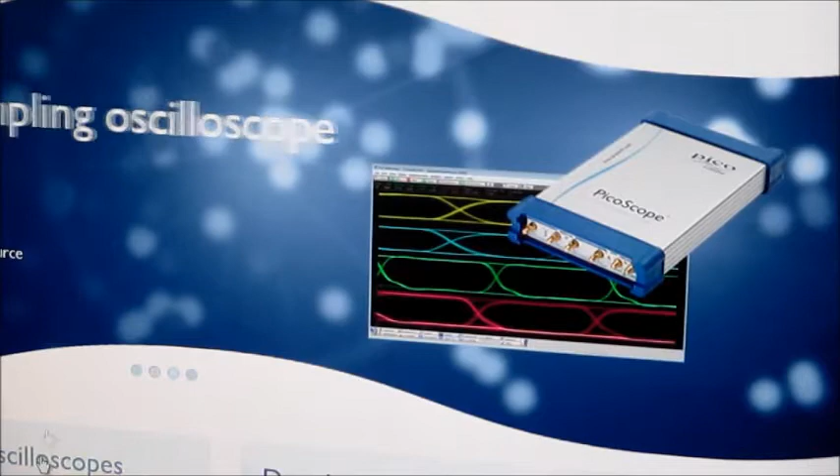Okay, this video is about second lab, Picoscope. Okay, it's a lab sheet for this 381 class. Again, it's called second lab. And I need to apologize, first of all, the Picoscope software is all PC driven, it's not Mac compatible. So I'm sorry, nothing I can do about that.

But once you get to picotech.com, come over here and do their downloads, and you can get their software. Software is free, and it shows up over here. Okay, you can download it on your PC. This way you can view all the folders and saved waveforms. I'm going to go view. So I'm just going to go ahead and close this out.

Okay, in this folder I've got 381 Pico folder, first exercises folder, TDC. You need to download or click and drag this folder onto your desktop, because that is a great little software. We'll show you how that works later. We'll open that up as we go. But for starters, let's do this.

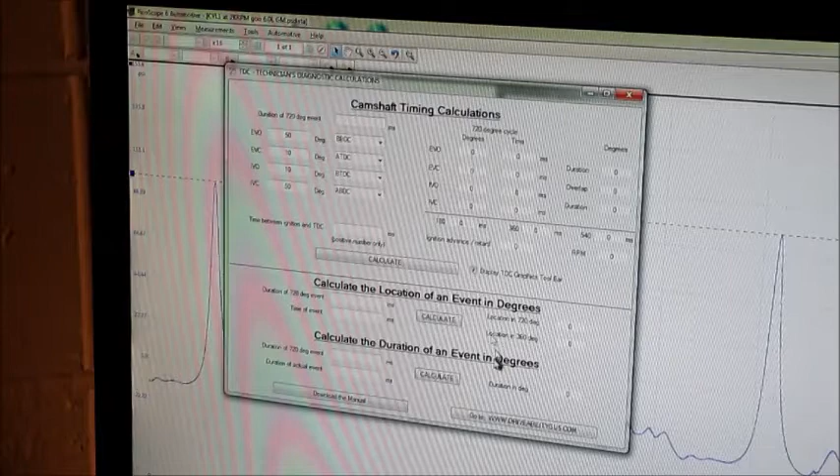Calculate. Let's get this out of the way. Let's show you what this is all about. So I'm going to turn an overlay on, and look what appears. I can put that peak with this 0 degree indicator, 720 degree cycle event. We'll slide that there to the other peak. I'm going to drag this down. We got to readjust it. It always changes a little. You got to change it back and forth a few times.

Okay, 0, 180 degrees. We're at bottom dead center now. Here's where the exhaust valve just starts to open. And then top dead exhaust stroke, of course there's no peak here of pressure because the valves are open, especially the exhaust valve. That's where a peak would be for top dead center exhaust, but once again, there's no pressure in the cylinder, the exhaust valve's open.

Somewhere in this region is where the intake valve opens because we start being exposed back to the vacuum. Of course, the piston's moving down, the intake valve is moving open, and this will be like bottom dead center after the intake stroke. The intake valve probably closes right here, and we start to build pressure again for the next event.

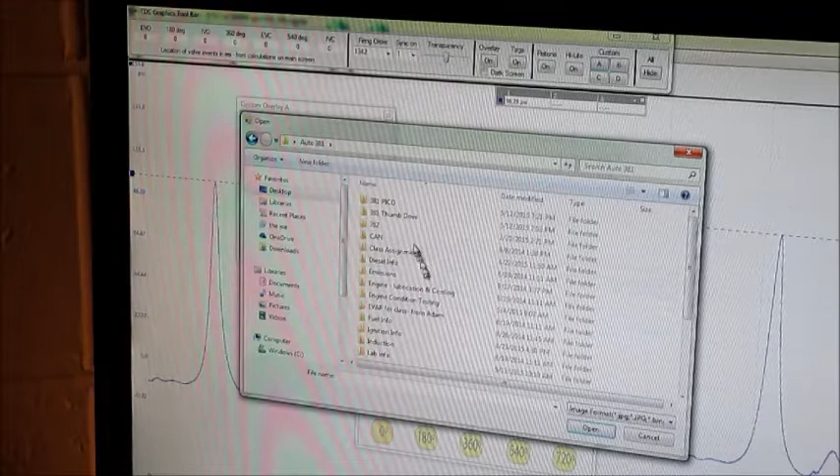Let me think here. Where have I got that hidden? Just got to find my TDC software folder. So let's go into Pico. Whoops. Where have I got that folder? Here we go. In the actual software folder, overlays. And I like this red compression 3 bitmap, if that's what it's called.

And I now have degrees, and I can overlay this. I'm just going to clear this one out, and let's use this overlay instead, because now I understand how the degrees are. I'm going to go peak to peak, and I'm going to drag this down. So now, whoops, slightly slid it off. Drag it down just a little bit so I can explain more.

Every one of these red little hash lines is 30 degrees. 30, 60, 90, 120, 150, 180. Here is where bottom dead center would be. We like to see the exhaust valve open somewhere really close to 30 degrees before bottom dead center. We also like to see an intake valve.

Look, here's where peak exhaust would be. The intake valve needs to happen pretty close within 30 degrees of top dead center exhaust stroke. And of course, as the intake valve opens, the piston's moving down. Imagine the piston moving down, the intake valve's open, we're building back into vacuum. Intake valve must close pretty close to here, because as it closes, the piston obviously is moving up, building pressure for the next event. Okay, that's the overlays. And here's where much of the diagnostics occur.

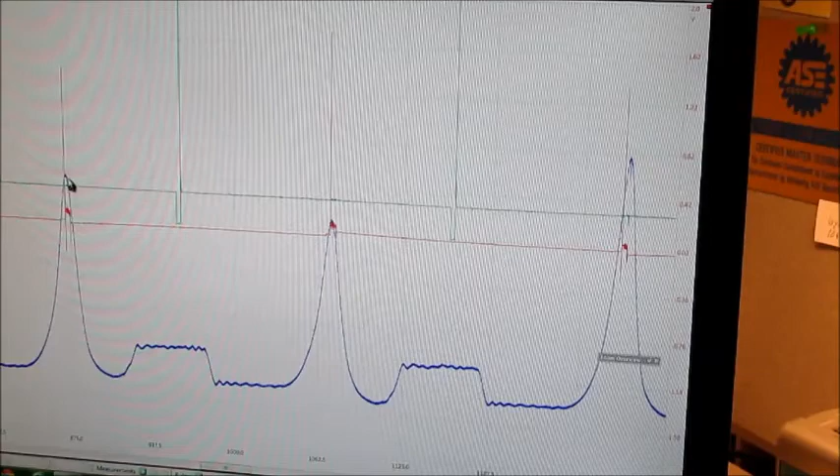This red line, I've synced it to ignition. And if you'll notice, you zero in, ignition fires a little before top dead center. Well, I hope so. Not only that, we've also synced into the fuel injector. Here's where the fuel injector fires. It's firing a little before an intake valve opens. So if I come over to here and come straight up, the injector fires a little before the intake valve opens. You can look to see if ignition timing and injector timing look like they should. This is a good pattern.

All right, I'm going to go grab one more file. The Malibu. Now, this car has variable valve timing, camshaft phasers. And you're going to notice there's a little bit different look over here. It's a little different looking.

A lot of things we've said before all apply to probably a solid camshaft, not a variable valve timing camshaft. So you are going to see differences in different vehicles. And we'll probably have to get used to these kinds of patterns and start understanding what's normal for each engine individually. But again, compare a good cylinder to a known bad cylinder, and it will work out.

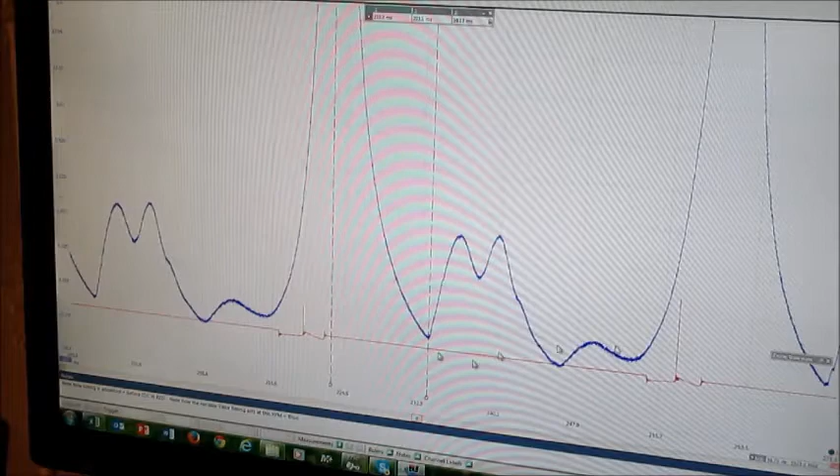Let's see. Look at the firing here. Of course, this is at 3,400 RPM. And I'll go back up to times 64. Ignition fires before top dead center. In fact, it's even more off center. It's even happening earlier. I can't change my scale; that's the picture it took. I'm just scrolling my mouse, doing my times. That's not too controlled. You can see ignition fires earlier at this RPM.

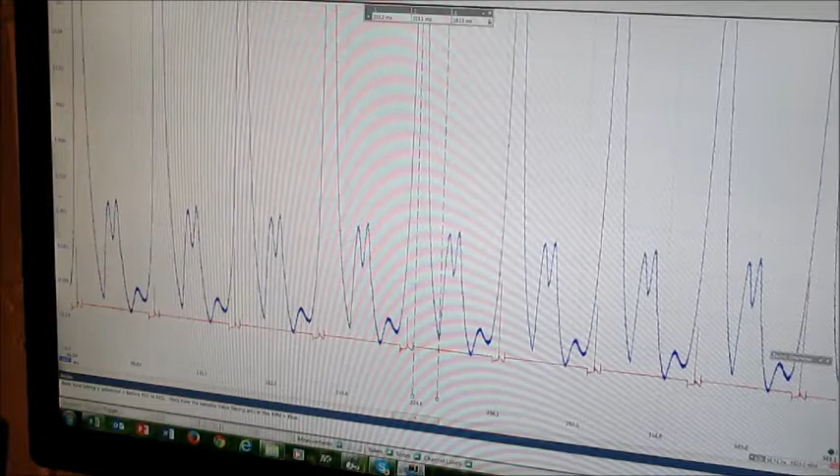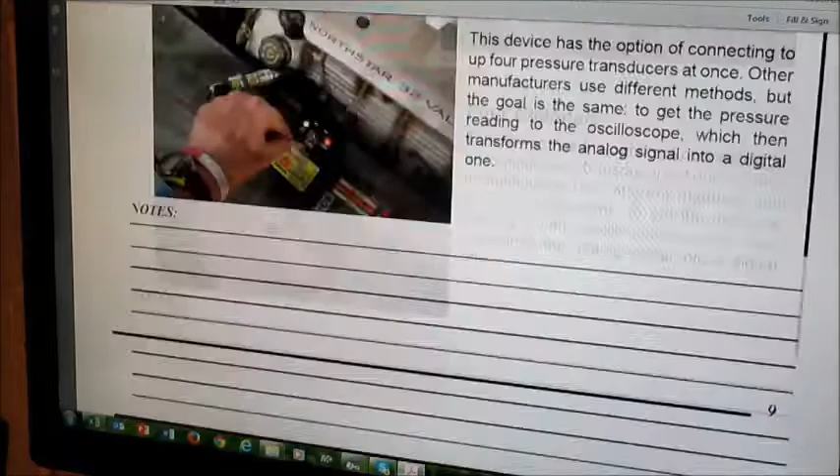Well, there's an introduction to Picoscope. I hope this has been helpful. In this folder, there's also the CarQuest book that talks a lot about pressure analysis. It starts going through here, and let's go a little bit further, and we start talking about the nuts and bolts of cylinder waveform analysis. It's a great book. Good luck.

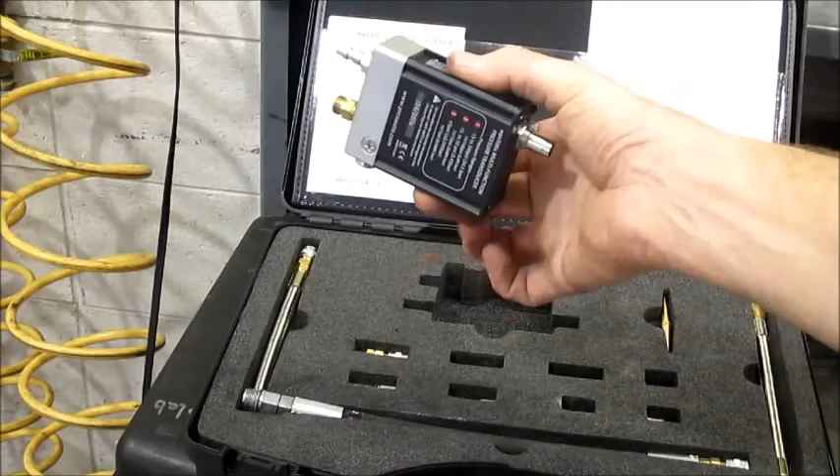Okay, this segment of our video is going to talk about the pressure cylinder waveform kit from Pico. All right, in this kit, and this is about a $700 or $800 kit, we have our pressure transducer. Please don't drop this. But you do turn it on once it gets all hooked up in the cylinder. You'll hook your scope up here. Your lead from the spark plug hole will connect here.

Okay, I'll set that there. This, of course, goes down inside the cylinder. Take the spark plug out, and this lead hooks up to our pressure transducer right here. This is for measuring fluid. You can actually measure fluid pressures if you'd like. But here's pressure. And again, it has a power button when you get hooked up. There is a power wire, so it goes to a USB port, keeps this powered. Still have your channel and a little power wire, both hooked up electrically to the scope.

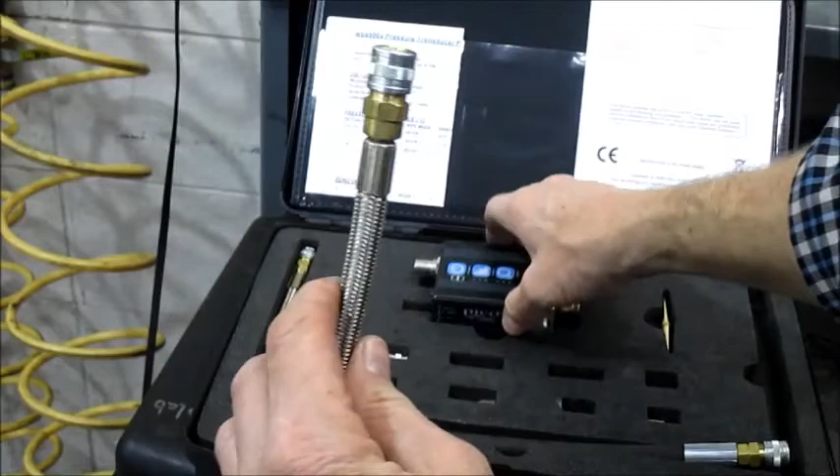There's different fittings on here you can remove if you need a longer thread for your spark plug hole. And please anti-seize the thread. There's a little bit of anti-seize on here left over. Sure makes it coming in and out of the hole a lot easier. This silver braided piece is actually for hooking onto fuel pressure ports. And we can actually hook up to and measure the pulses, the pressure pulses in a fuel injector rail. Okay, that's an intro to the rest of the kit.

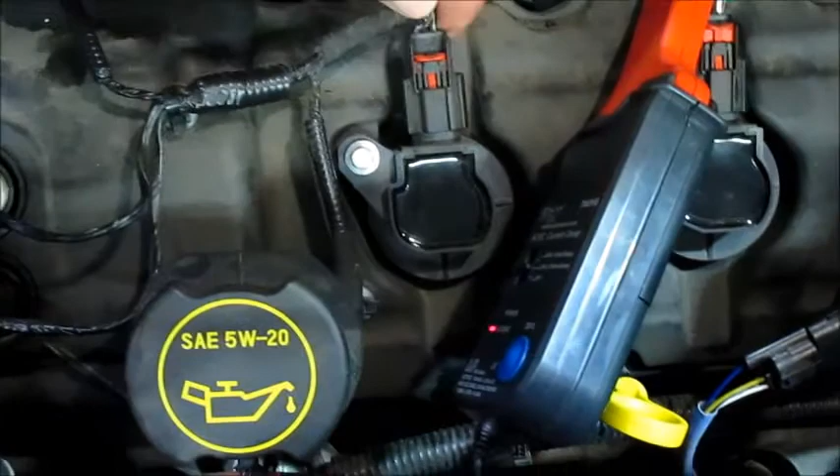Okay, now let's go ahead and get a voltage pattern and current ramp on an ignition coil. Now, the reason I chose these wires is, once again, this ignition coil has a purple wire, and it looks like a green wire. This ignition coil's got a purple wire and a white wire. And this ignition coil's got a purple wire and a brown wire. So purple's got to be power from the ignition switch. Whereas the white wire, the brown wire, or the green one, that's got to be your control circuit from the PCM.

And again, I'm going to current ramp the power wire from the battery, and I'm going to voltage check the signal wire. Every ignition system turns the negative side on and off. Let's come over here and we'll do the same thing. Oh, one detail. If I'm going to mess with higher voltages, because it's an ignition system, channel A here is back probed to the negative side of the coil-on-plug. Anytime you're above 40 or 50 volts, you're supposed to attenuate. So here's a 20-to-1 attenuator.

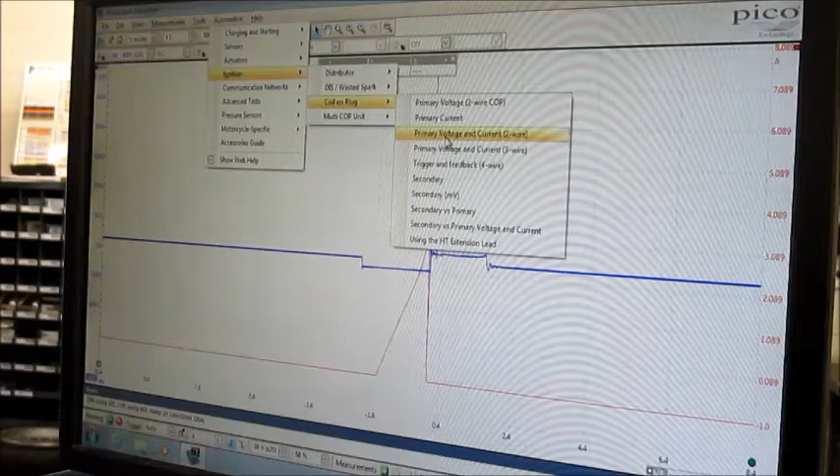And the duration, let's get some cursors, and well, first of all, how do we get here? Back again to automotive ignition. Let's go to coil-on-plug. We got lots of things to choose from. I'm gonna go down to primary voltage and current, and this is a 2-wire coil. Some have 3 and some have 4. GM likes the 4-wire coils, and there's reasons for that, but let's continue on. So here's my voltages, and of course we're going to bring up my little sample. And my example looks pretty close to that. Let's go ahead and actually run.

And I'm going to slide this up. In fact, how many volts are we at? I'm going to bring a cursor. Cursor says peak of that primary ignition pattern is 330 volts. Not uncommon for primary side to see that. Now mostly it's 12, 13, 14 volts. But when we fire the plug, the coil windings collapse, we induce a high spike of voltage, and then we actually burn.

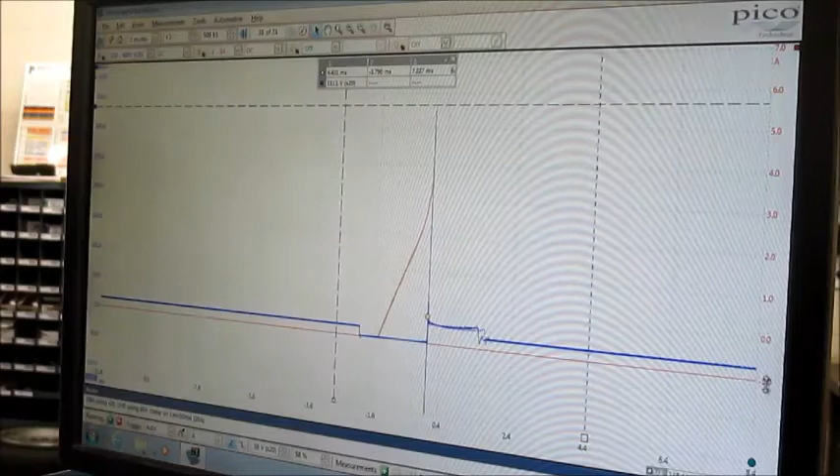Looks like the coil is drawing approximately, get this on a 0 here so I can get a real viewing. Current comes across, it's drawing about, well, -1, 0, so what's that, 2, 3, 4 amps, a little over 4 amps. And this coil, a normal one, looks like it doesn't peak out or level off. It just keeps building until we fire the spark plug. But this is a current ramping and voltage pattern check for a coil on plug.

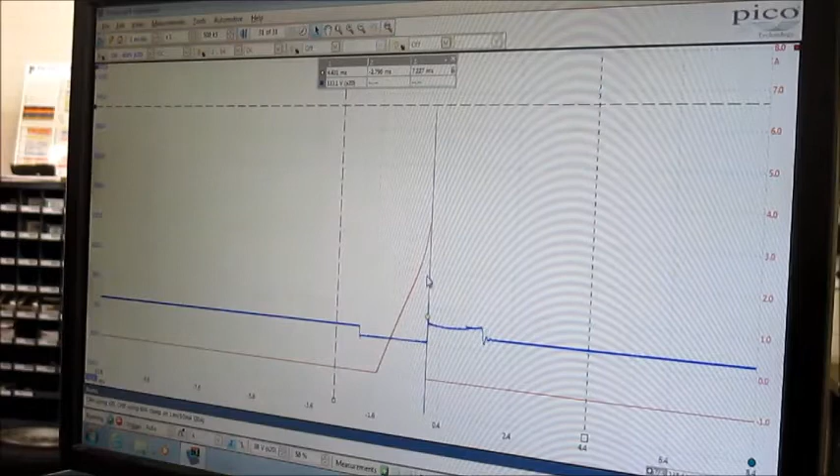Often a weak coil won't build normal current. What's normal? Well, it depends on the manufacturer, but normal is typically somewhere between 4 to 8 amps. Okay, let's talk about current ramping a fuel injector. Here's the ignition coils for coil on plug. Maybe we'll view those later. But I want to get a voltage and a current ramp pattern on this fuel injector.

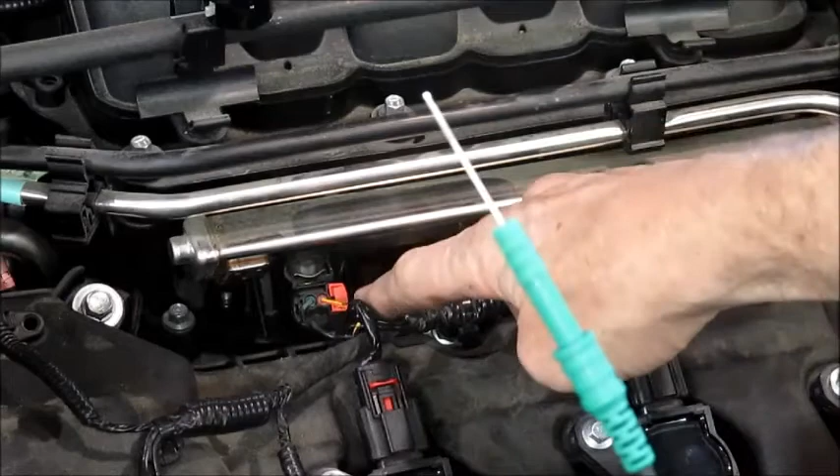Okay, to set up, I've got channel A. Now I know this is the negative side of the injector because the positive side, each of these 3 injectors on this V6 Ford 3.5 liter non-turbo 2014 Expedition, each of these injectors have a blue wire, and the blue wire to each fuel injector has got to be from the ignition switch.

Now each injector is a different color wire for the negative side that goes to the driver inside the PCM. This one's got a yellow wire. This one has like a brown wire, and this one over here has a green wire. Well, I'm going to back probe the negative side of the injector. I want to watch how it fires. The PCM controls the ground side. Back probe that, good.

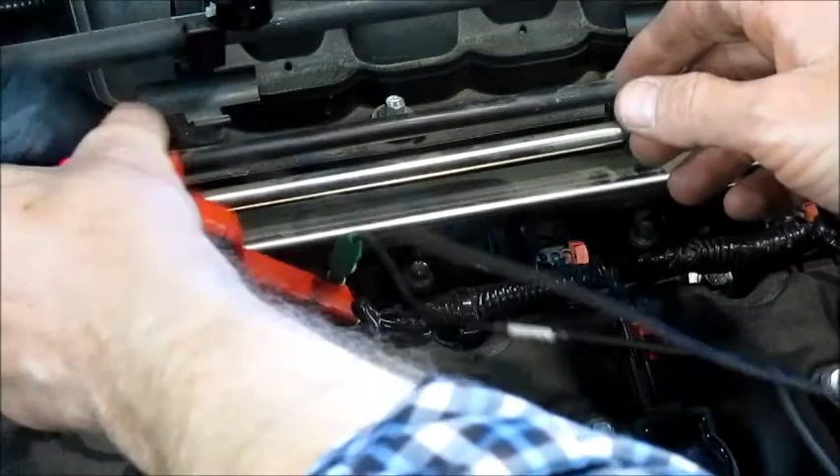At the same time, on channel B, I'm going to use this current probe, just a low amp current probe. I'm going to current probe the positive wire, the one from the ignition switch, not the one that goes to the PCM. We're going to watch the current flow and the negative side voltage. So we're going to current ramp and voltage this fuel injector. Okay. So, over here to the PicoScope. Let's see how I manipulate this. Get this to cooperate a little better.

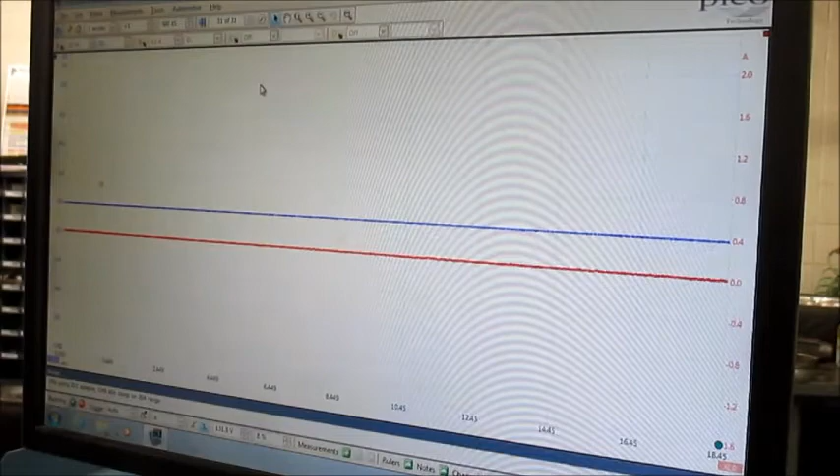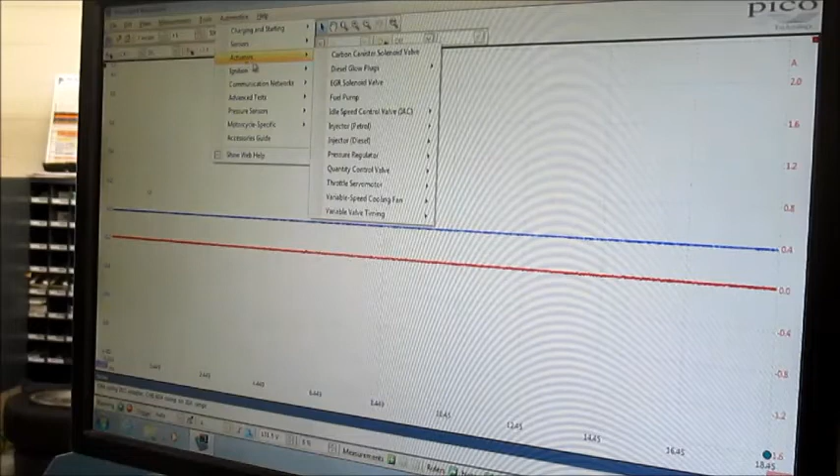Okay. Now this is direct injected, so the voltage values are not going to be the same. But I'm still going to select automotive, come down to actuators. A fuel injector is definitely an actuator. Going to come in here to fuel injector petrol or gasoline. Let's go down here to multi-point injection. That means an injector for each cylinder. Voltage versus current. And this is what Pico is going to give me. I'm going to close the window, and here's a sample. Okay.

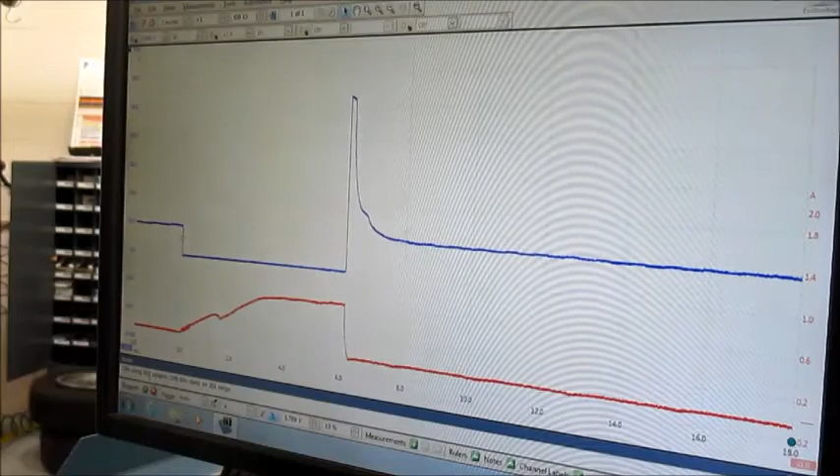Okay, well, let's set this one up. Okay, I'm going to hit running. You know how to do that over there, or hit the space bar. I think I'm going to filter. Let's get some filtering going on. And the current ramp one, I guess I could filter it too. We'll get up to that 1 megahertz. I'm not even sure what, or kilohertz, 2 or 3 kilohertz, something like that. Not even sure exactly what that means, but it sure makes a nice crisp line.

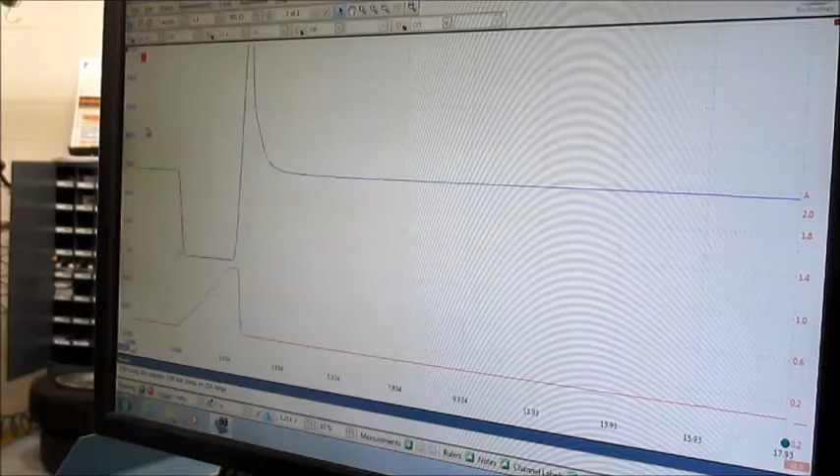Okay, I'm going to slide this up a little bit. There's my 0. There we go. Okay. Current ramp, look at that. I almost filtered, or if I filtered too much, I'm going to back off on the filtering. Well, didn't really change it. But nonetheless, you can see the current. It comes up. Wow, the pintle doesn't actually move till here, according to this one. Okay, here's our current ramp and voltage. The voltage pattern for a fuel injector for diagnosis.

Filtering's really going crazy. Let me filter the other direction. There we go. That looks normal. I'm going to filter the other direction. Let's go 5 kilohertz. Alrighty. That's more what I'm looking for. Again, for a fuel injector voltage pattern, the switch is closed. In fact, I'm going to do something. I'm going to go put it in gear and give it some throttle, and you watch what happens to the pulse width of this injector pattern.